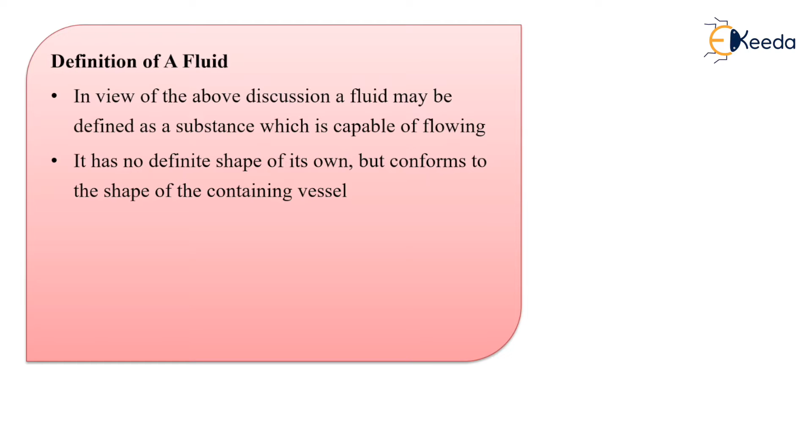Now let us see the definition of a fluid. In view of the above discussion, a fluid may be defined as a substance which is capable of flowing. It has no definite shape of its own but conforms to the shape of the containing vessel. Further, even a small amount of shear force exerted on the fluid will cause it to undergo deformation which continues as long as the force continues to be applied.

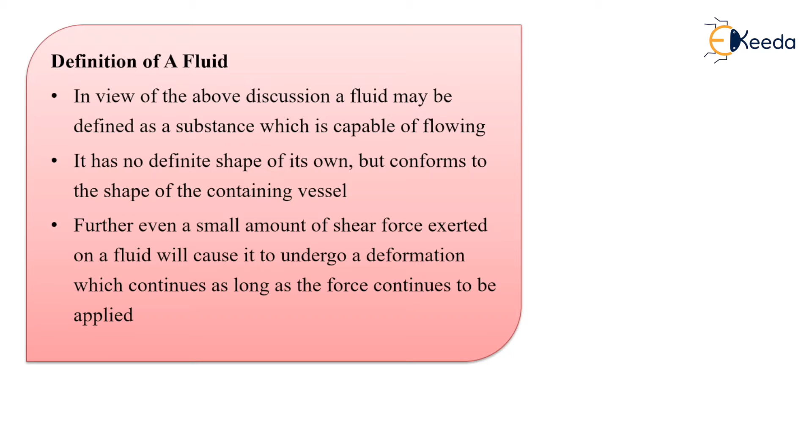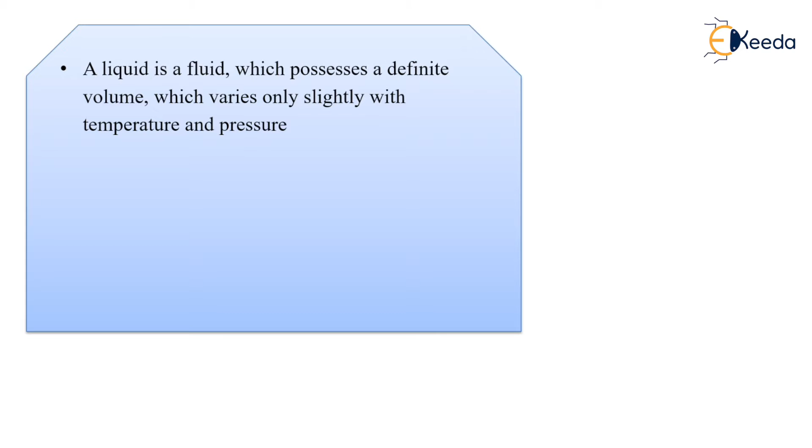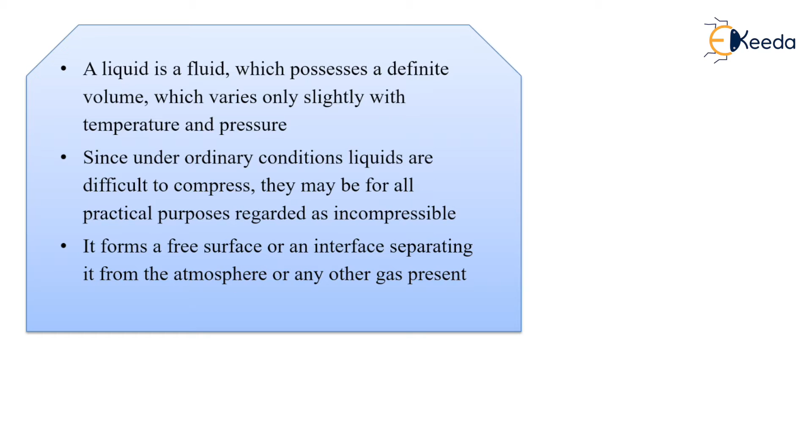A liquid is a fluid which possesses a definite volume which varies only slightly with temperature and pressure. Since under ordinary conditions liquids are difficult to compress, they may for all practical purposes be regarded as incompressible. It forms a free surface or an interface separating it from the atmosphere or any other gas present.

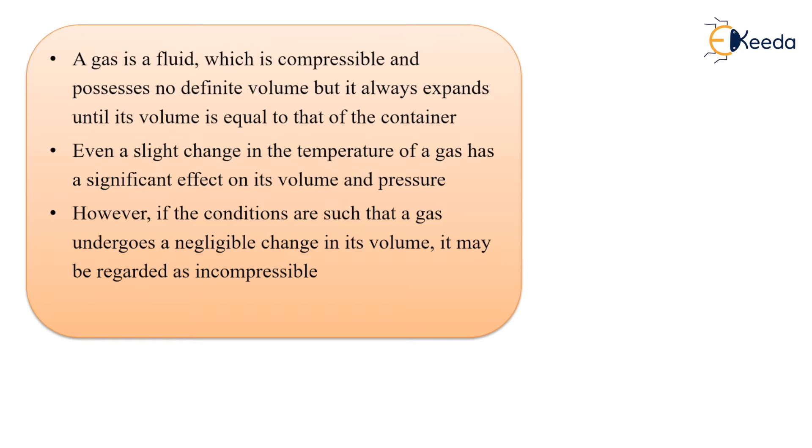A gas is a fluid which is compressible and possesses no definite volume, but it always expands until its volume is equal to that of the container. Even a slight change in the temperature of a gas has a significant effect on its volume and pressure. However, if the conditions are such that a gas undergoes a negligible change in its volume, it may be regarded as incompressible.

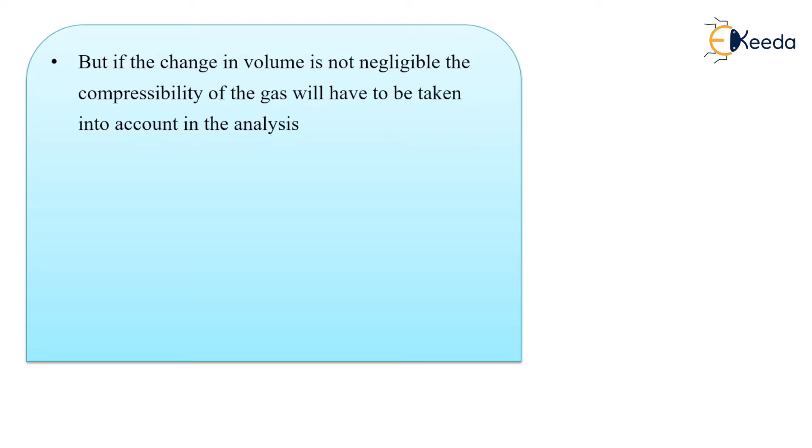But if the change in volume is not negligible, the compressibility of the gas will have to be taken into account in the analysis. A vapor is a gas whose temperature and pressure are such that it is very near to liquid state. Thus, steam may be considered as vapor because its state is normally not far from that of water.

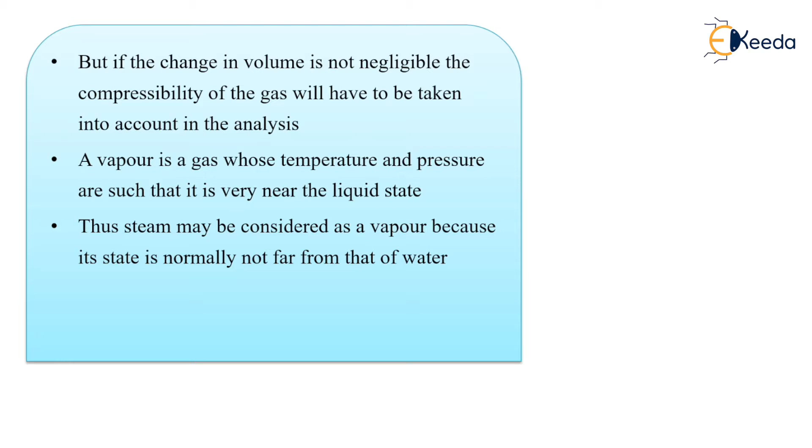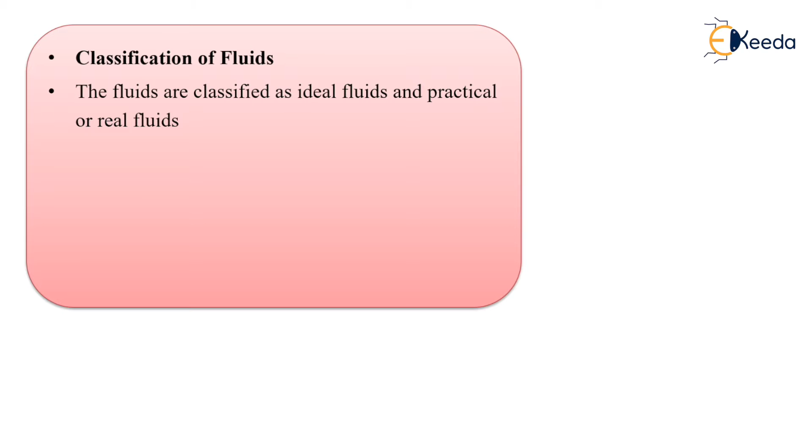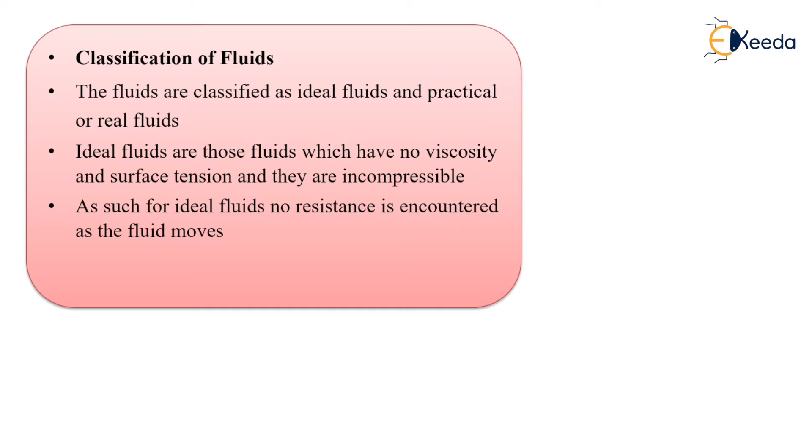We can classify the fluids as below. The fluids are classified as ideal fluids and practical or real fluids. Ideal fluids are those which have no viscosity and surface tension, and they are incompressible. As such, for ideal fluids no resistance is encountered as fluid moves.

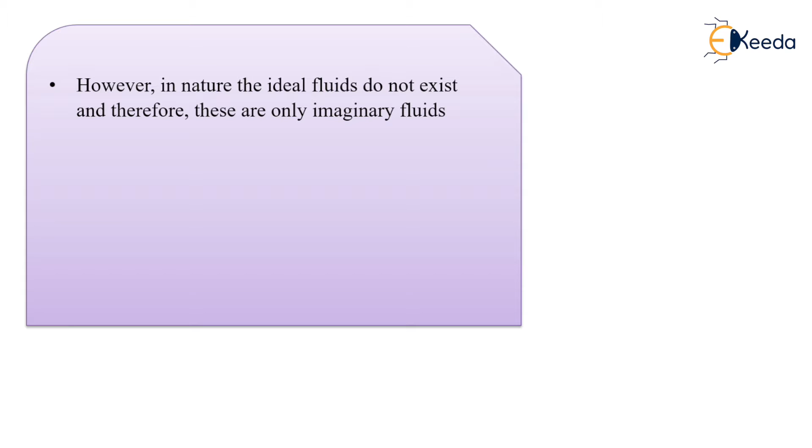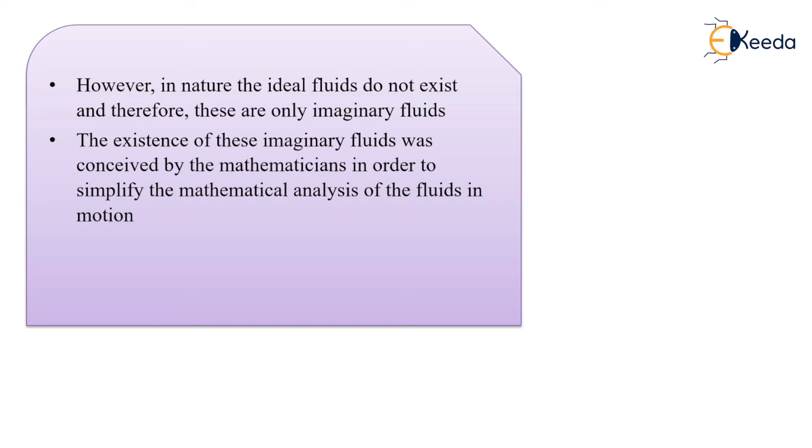However, in nature, ideal fluids do not exist, and therefore these are only imaginary fluids. The existence of these imaginary fluids was conceived by mathematicians in order to simplify mathematical analysis of fluids in motion. Fluids which have low viscosity, such as air and water, may however be treated as ideal fluids without much error.

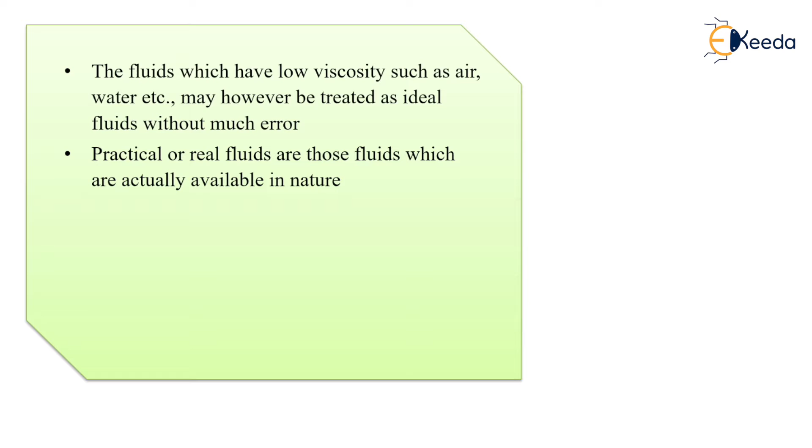Another type, that is practical or real fluids, are those fluids which are actually available in nature. These fluids possess properties such as viscosity, surface tension and compressibility. Therefore, a certain amount of resistance is always offered by these fluids when they are set in motion.

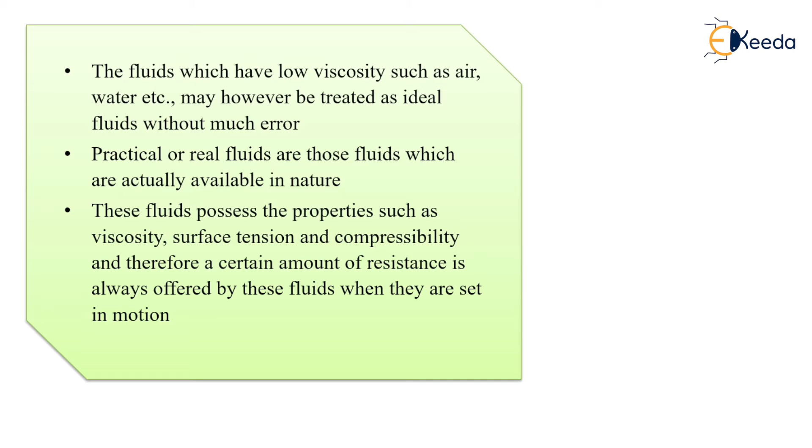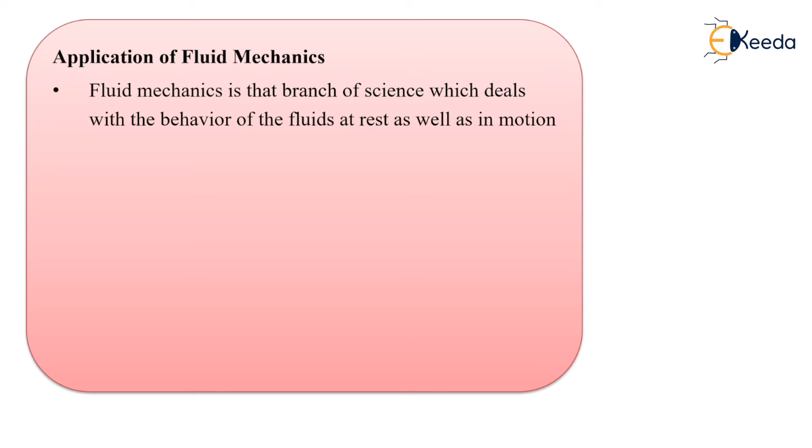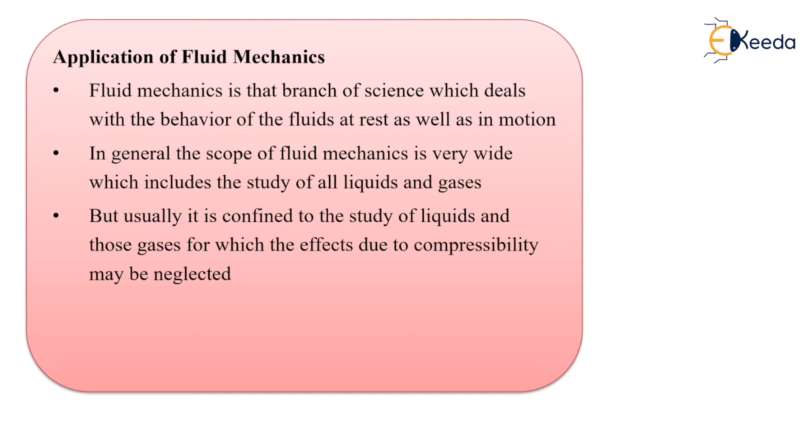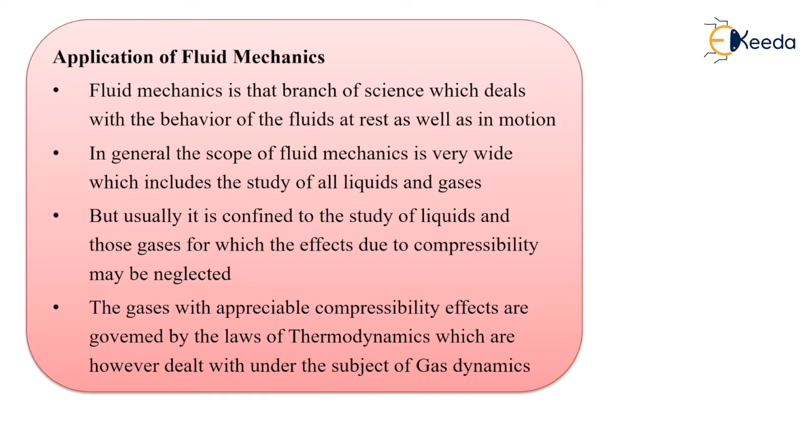Now let us see the application of fluid mechanics. Fluid mechanics is that branch of science which deals with the behavior of fluids at rest as well as in motion. In general, the scope of fluid mechanics is very wide, which includes the study of all liquids and gases. But usually it is confined to the study of liquids and those gases for which the effect due to compressibility may be neglected. The gases with appreciable compressibility effects are governed by the laws of thermodynamics, which are however dealt with under the subject of gas dynamics.

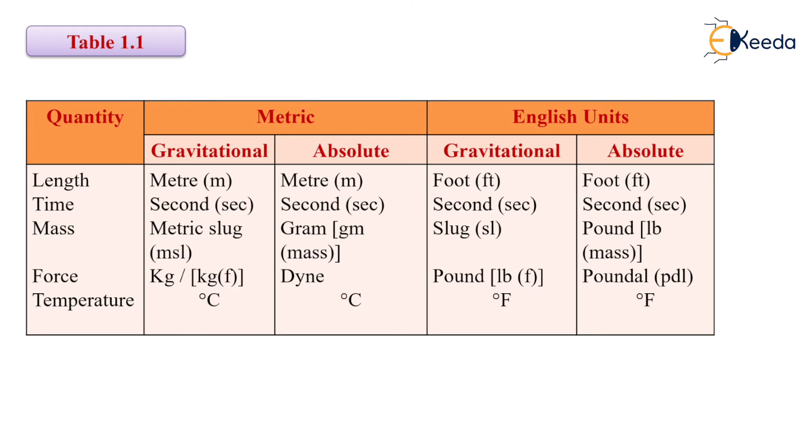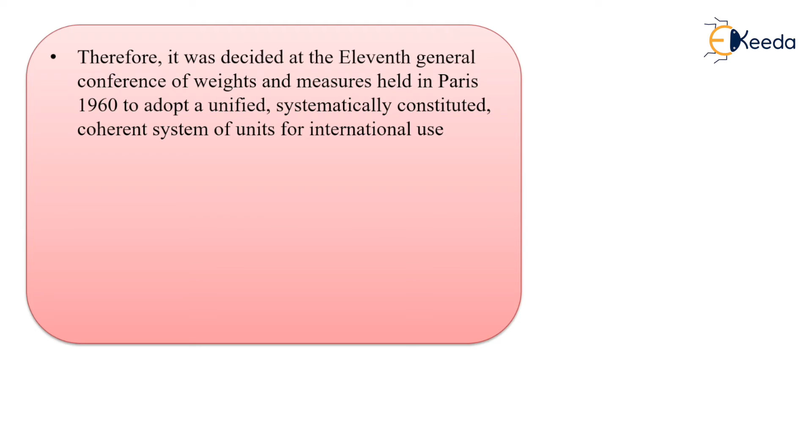As it is a confusing part that each country or each part of the world will follow a particular type of system, that may create confusing situations. So for that purpose, it was decided at the 11th General Conference of Weights and Measures held in Paris in 1960 to adopt a unified, systematically constituted, coherent system of units for international use. This system of units is called the International System of Units and is designated by the abbreviation SI units.

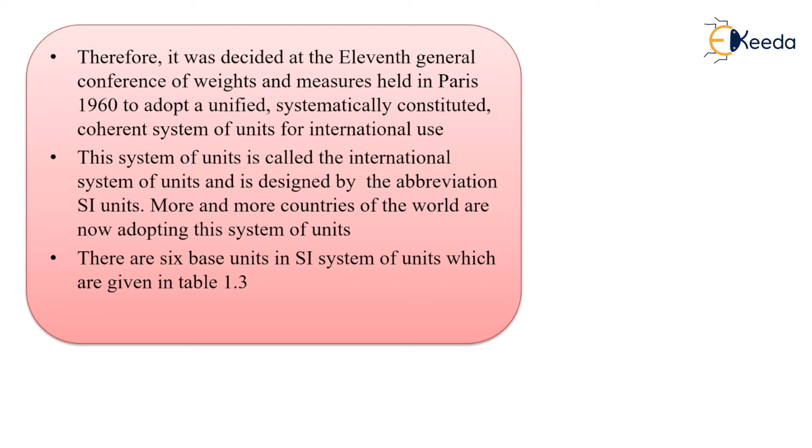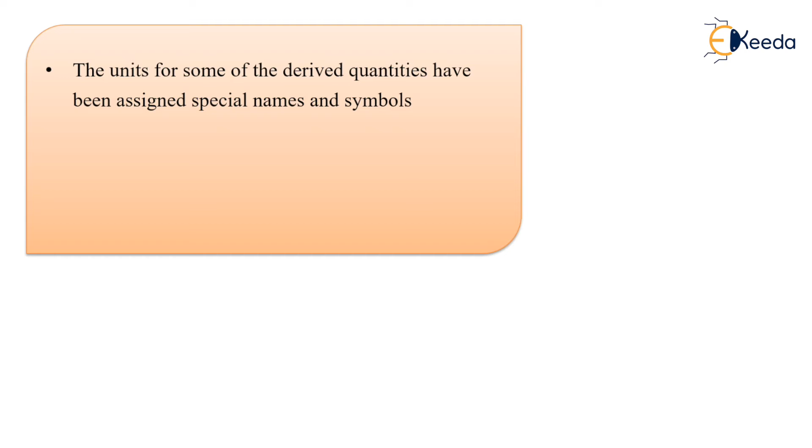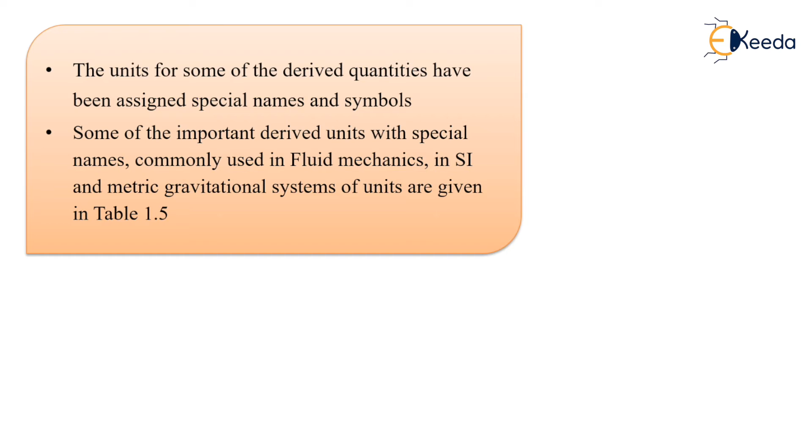The units for some of the derived quantities have been assigned special names and symbols. Some of the important derived units with special names, commonly used in fluid mechanics in SI and metric gravitational systems of units, are given in the further table.

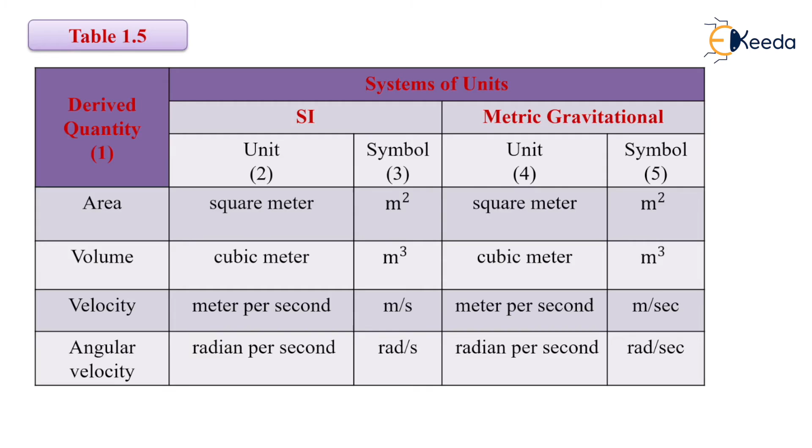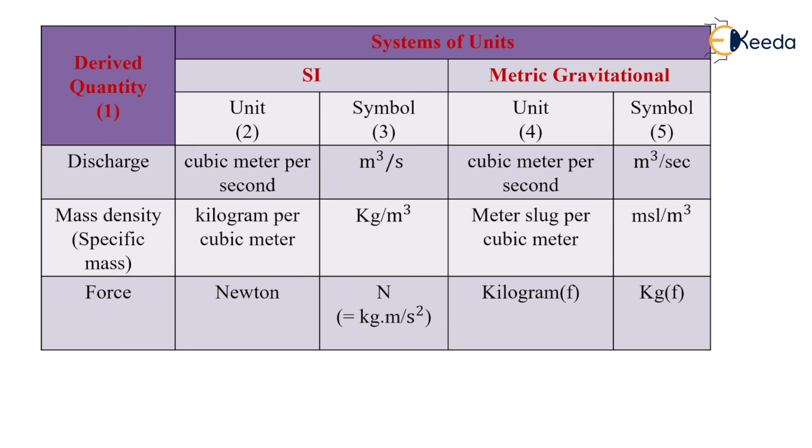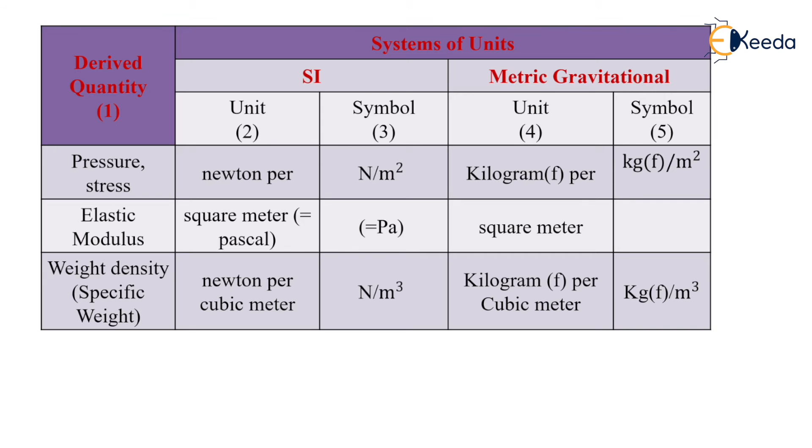1 Newton force is also the product of mass into acceleration, so kg into meter per second square. So Newton is equal to kg meter per second square. Pressure or stress have the same units, that is Newton per meter square. Elastic modulus in Pascal. Weight density in Newton per meter cube. Dynamic viscosity in Newton second per meter square.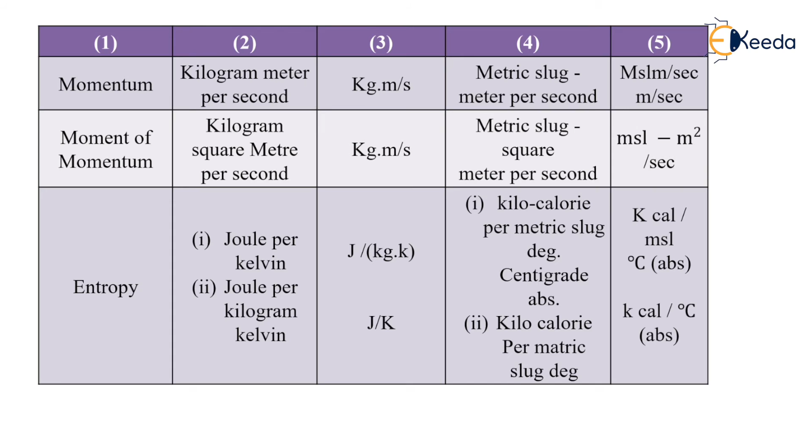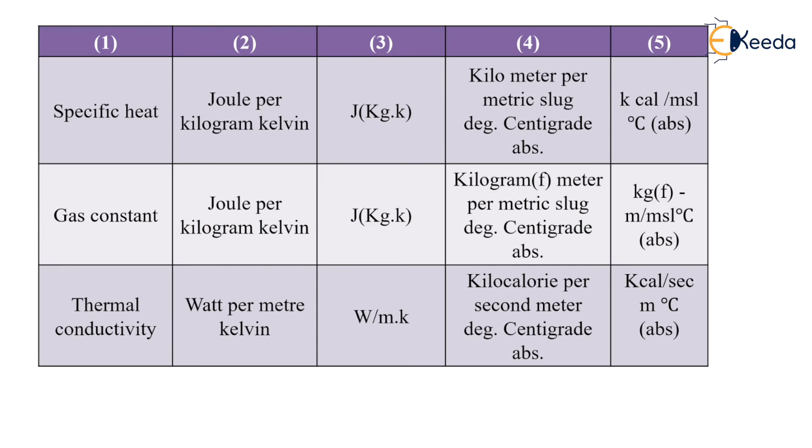Momentum in kg meter per second. Moment of momentum in kg meter per second. Entropy in joules per kg Kelvin. Specific heat in joules per kg Kelvin. Gas constant in joules per kg Kelvin. Thermal conductivity in watt per meter Kelvin.

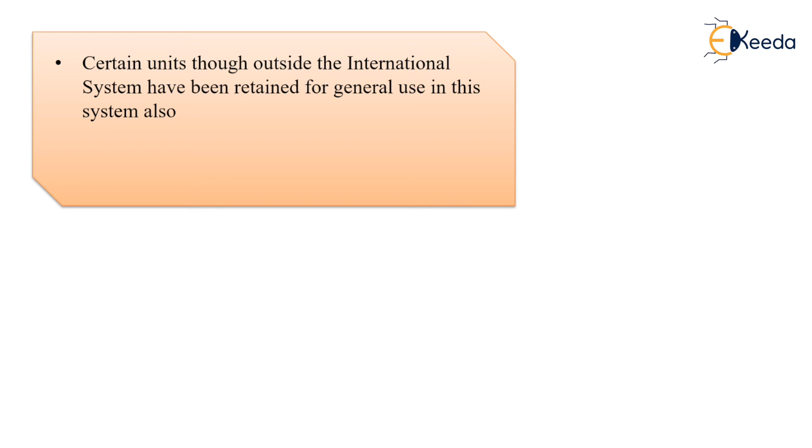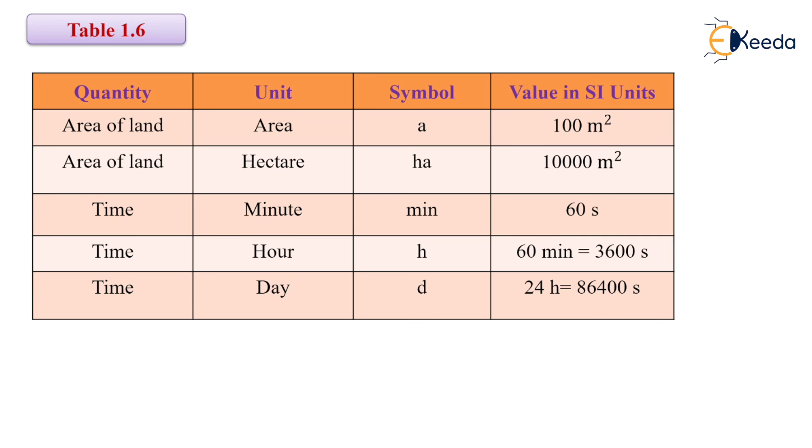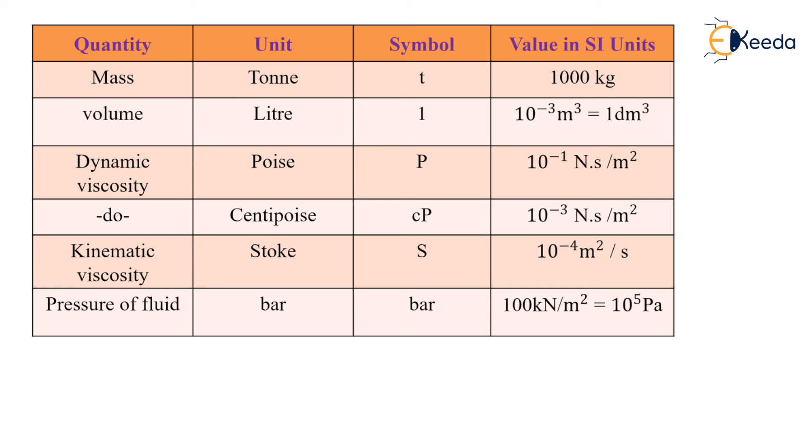Certain units, though outside the international system, have been retained for general use as shown in the table. Area of land may be in hectare, time may be in minute, hour or day, mass in ton, volume in liter, dynamic viscosity in poise or centipoise, kinematic viscosity in stokes, and pressure of fluid in bar.

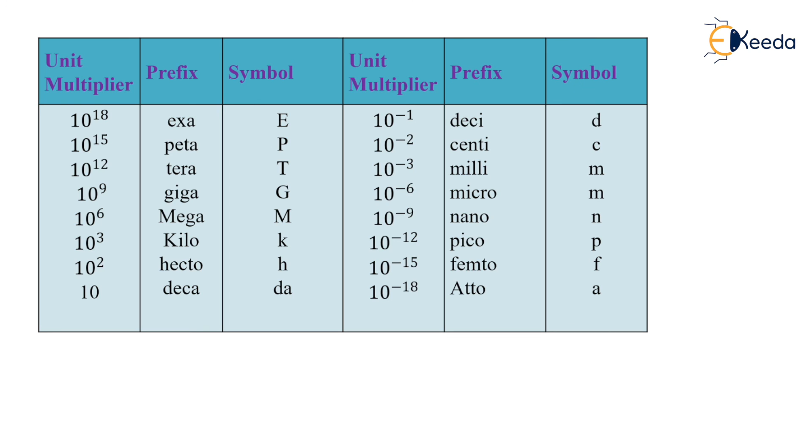This further table states various prefixes used in case of multipliers. We all know 1 kilogram is equal to 1000 grams, so 1000 means 10 raised to 3. So when the multiplier is 10 raised to 3, we use the prefix kilo. These prefixes for increasing powers are: 10 raised to 1 is deca, then hecto, kilo, mega, giga, tera, peta and exa. For decreasing order: 10 raised to minus 1 is deci, 10 raised to minus 2 is centi, then milli, micro, nano, pico, femto and atto, as shown in the table.